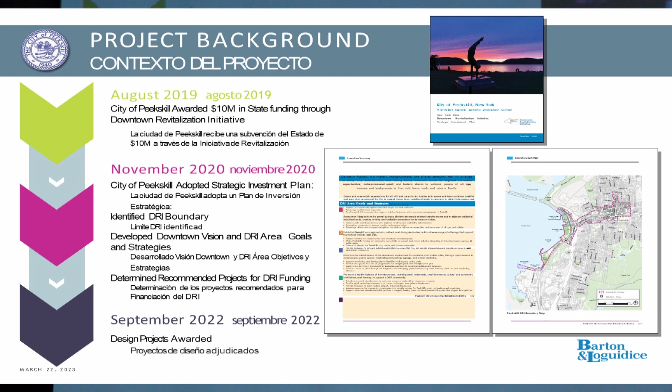In September, these 2 projects were awarded to B&L, Barton and Loguidice, and we've been working closely with the city ever since. We started with a site walkthrough with the city back in September of 2022, and we've also had a surveyor come survey key areas along our project corridor, allowing us to bring the conceptual design we're looking at today.

During this time, we've also met with our Project Advisory Committee twice and presented this to the City Common Council. The drawings you'll see tonight were shown at the PAC's second meeting at the end of February and to the Common Council earlier this month. Now we're meeting with you, and we'll take all your comments to further these drawings into the final 95% design plans.

We're meeting with Peter and the city weekly, so all of these conversations and designs are still a work in progress, looking through all the different opportunities and constraints throughout this corridor.

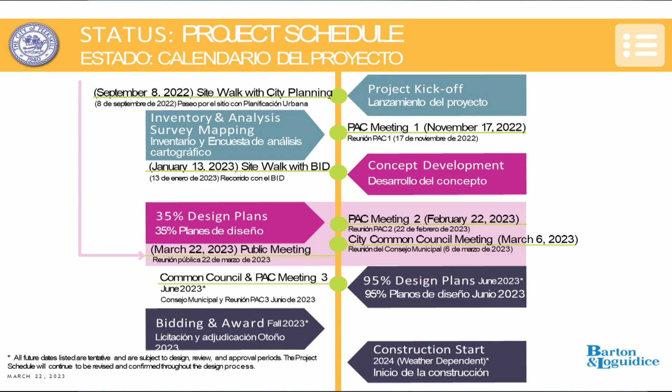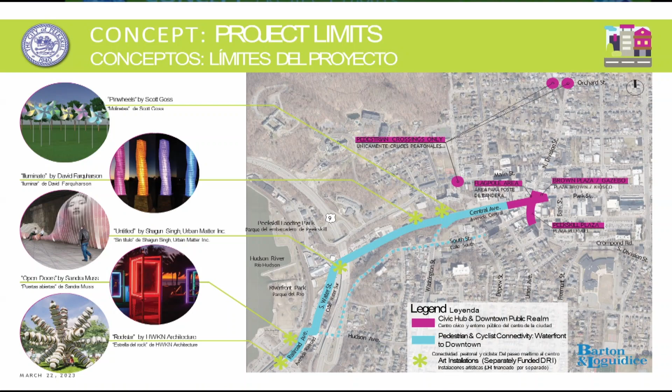Throughout tonight, we'll be using terms for active transportation and multimodal transportation, so to get us on the same page: a cycle track is a 2-way bike lane. Bike lanes you might be familiar with travel in the same direction as cars, with another lane in the opposite direction. A cycle track instead has 2-way bike traffic on one side of the street, separated from vehicular traffic by a buffer.

A shared use path is where bicyclists and people walking share the pathway. These are used in situations where there's not enough room on the roadway for bike lanes or a cycle track, but there is enough space on the sidewalk area to allow bicyclists and pedestrians to share the space.

A sharrow is a marking on the pavement, which is another case where there's not enough space to have a designated bike lane or a cycle track, but it allows vehicles traveling in the space to understand that bikes are sharing the roadway with them.

Bollards are vertical separation pieces that can be used. They're at the end of North Division for when they close it off for Restaurant Row. The bollards are on either side to prevent vehicular traffic from entering that space.

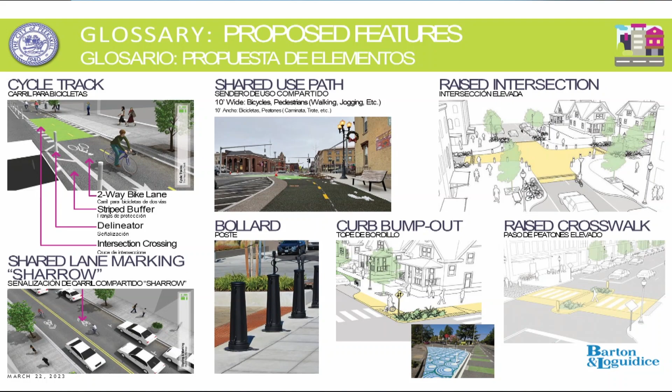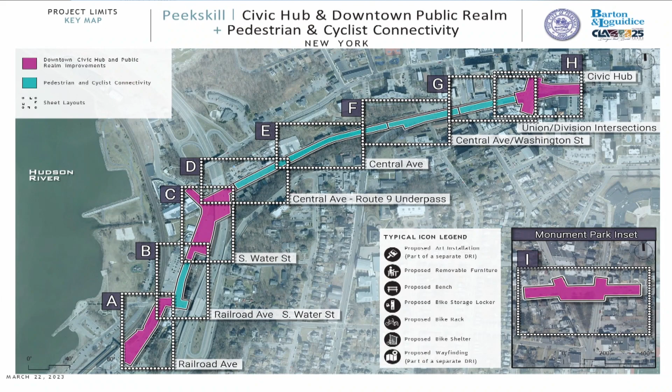This is an overall map of our project area, and our presentation tonight is going to walk you from the train station down at the A rectangle up to the intersection of Central Ave and Division at the H area. I'm going to hand it over to Dan now to start taking us up the corridor.

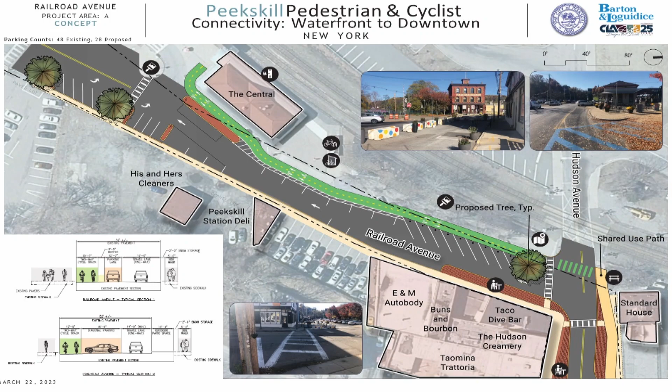As we wrap around the corner, from Hudson over to South Water Street, we pick up the cycle track again in front of the parking lot. In order to make this cycle track, we're showing rearranging how the parking lot currently exists.

Currently, it's like two parking lots, so we're consolidating it into one parking lot, and then reimagining that space with a new curb layout, new driveway entrances, and room for a planter strip for trees and the cycle track on the west side of the road.

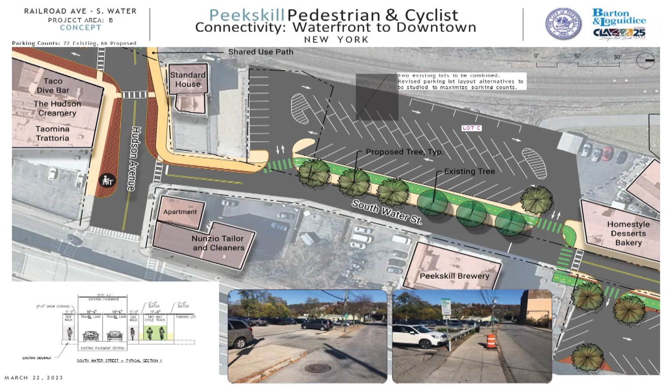And then as you approach the brewery here, another cyclist and pedestrian crossing of Hudson, or of Water Street.

So after we make that crossing, continue down Water Street as we approach Central Ave. Same idea here as on the previous slide, kind of fixing the curb line. Right now these spaces are right up on the road and people are just pulling out onto the road. There's no real parking bumpers or curb or anything, it's not ideal to have pedestrians there or cyclists. So formalizing that parking a little bit better and creating that barrier with curb, the cycle track area, forcing people to actually back out of the space and use the driveway entrances as everyone really expects a car to do. And also that provides us that space so we can get that dedicated bicycle facility here.

I'd also like to point out this intersection of South Water Street. Right now that pavement is so wide, and that angle here, it's just an opportunity for people to speed through there. It's just a very wide open space. And once you're here and you're looking that way, you can see from one end to the other. It's just very inviting for someone to speed. So we're trying to tighten this up, create this curb bump out here, forcing drivers to pull up and kind of make a right angle, force them to stop, and then you have to actually take a 90-degree turn. And same with over here, we're bumping out this area so people can't have that straight shot. You have to kind of snake around. It's just subtle ways to force people to slow down and make sure your eyes are paying attention to what's happening around you.

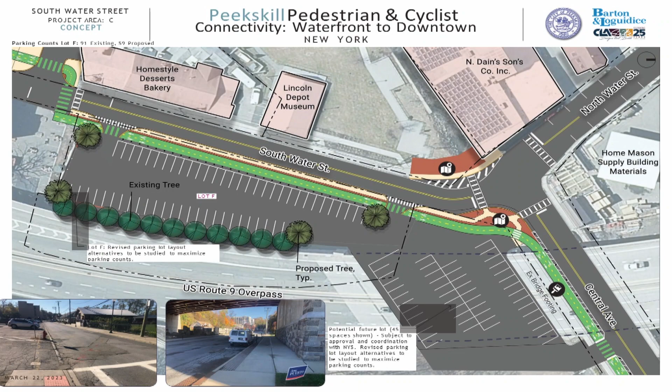And we will move over to Central Avenue. So at Central Avenue, we have the cycle track on the south side of the road. And in order to do this, we're staying within the existing pavement limits, so no actual road work here. It's just reallocating the space that's available, shifting the travel lanes over, kind of defining them with the yellow center line, so fit the cars where they need to be. On-street parking would be available down at the bottom of the hill here. And the south side was chosen because there's less conflict points, less driveway crossings than the north side.

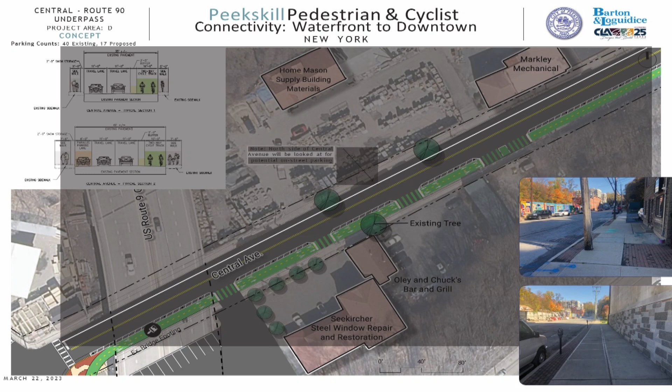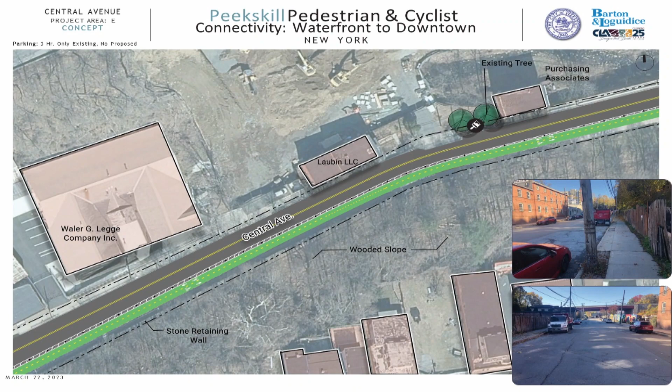Let me see if I can go. Just going up the hill, the same idea, the same theme, just reallocating the space, moving cars to the north, cyclists to the south, and a cross-section view of what that would look like, elevation view if you were standing on the road. So this is what we have now, kind of wider travel lanes, parallel parking, and once you get up the hill, as you start to make that turn, the road narrows, so there would be 2 travel lanes here, no parking lane, and the cycle track. So this is ultimately what it would look like when the project is complete.

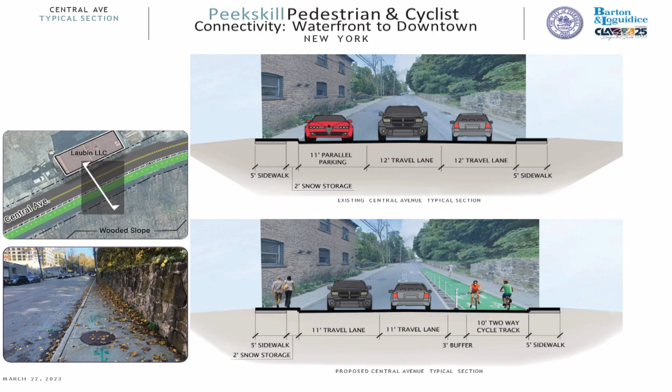And again, going up, here's Washington Street intersection, which is kind of an interesting intersection in itself. So we've tried to clean it up as best we can as far as the project objective for here goes. And making it very apparent with this green dash striping that there's other people using this space rather than just cars. So we have Sharrows on Washington Street. We're shortening up this crossing, getting rid of that little triangle island that's in there, extending the curb out, and formalizing these crosswalks for pedestrians just to try and help make everyone pay attention when you're driving that there's other things happening here and we have other facilities for other users now.

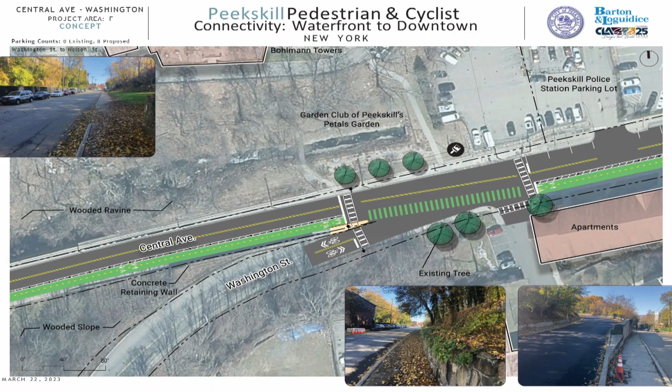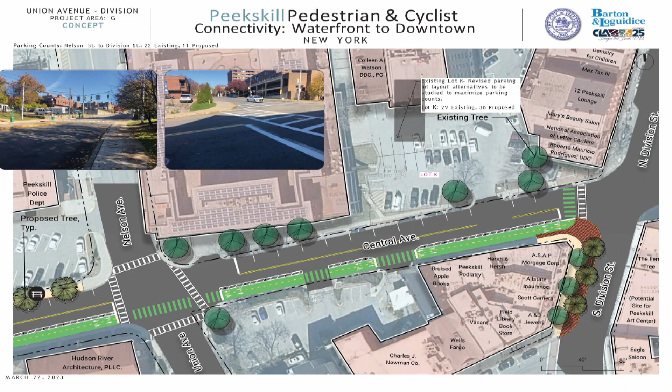And as we approach the end of this project corridor, where Central Ave meets North Division, South Division Street, so we cross Union Ave here. So we're fixing up the crosswalks again for pedestrians and the cyclist crossing here. Couple driveway crossings as we approach the end. And again, we're changing how the space looks now, allowing parking on the north side, using the south side for the cycle track. And ultimately, as we get up to the intersection, we're crossing, and this is kind of the termination point for the connectivity project, which is where the Civic Hub project picks up next.

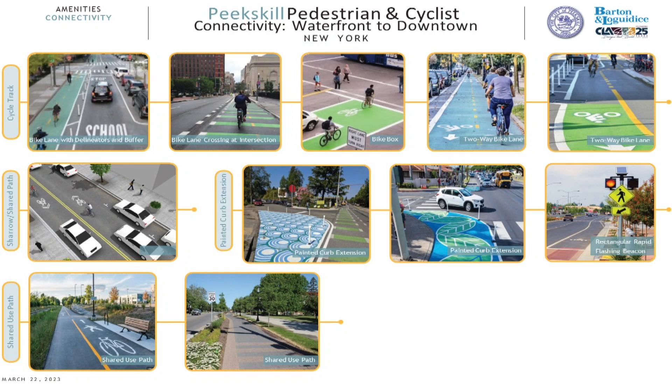On the previous slide, we do have state grant funding to improve the crosswalk. So at Union and Central, on the image shown, we hope to make it a high visibility stamped concrete red crosswalk like others downtown, and that's something we can continue to build out.

And then the most important thing is budget. We have a limited budget, and I will work hard to get more money, but at the end of the day, we won't necessarily have enough grant funding to do everything that you will see tonight. So part of the reason you're here, and we're hopeful for your feedback, is to understand what the priorities are from the community so we can make some difficult decisions.

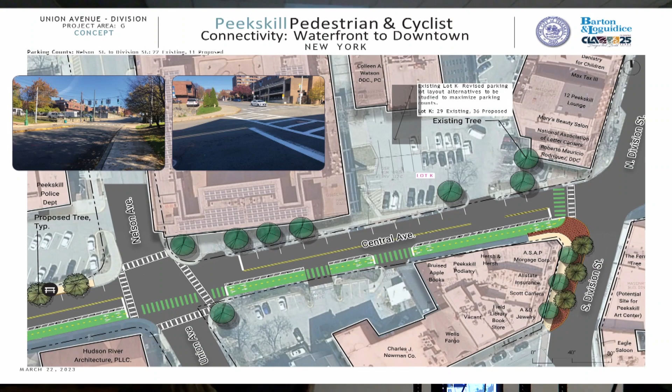Okay, thanks. Thank you, Corey. Okay, quick question. No, I love this project.

I'm really looking forward to full bike lanes. The question is about one of Peter's last comments, that there's not enough money basically. What are your proposed cuts or ways of minimizing things to make it fit the budget? So the question was, what are we thinking of for proposed cuts to reduce the budget to fit what the project funding has available?

Okay. So do you want me to get that? Or, there you go. No, I was repeating it for the interpreters. Sorry. Yeah.

So we're here to get feedback on what everybody in the community likes. There's no preconceived notion that we're going to get rid of this object or this scenario here. We want to take the feedback today and work with the city on what's feasible for them to maintain and keep going in the future. But there's nothing planned at the moment.

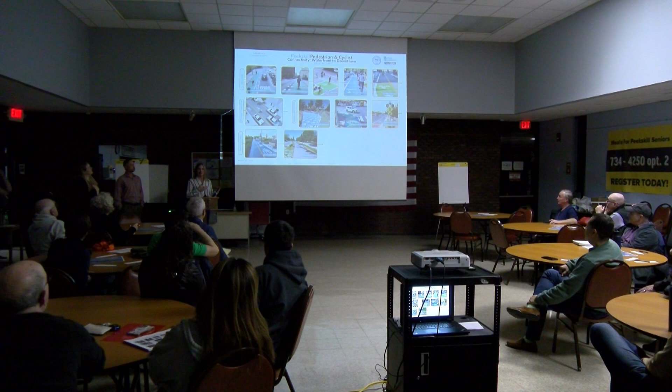One thing I wanted to point out on this slide, we talked about curb bump outs, and at the intersection of South Water and Central, on one side we showed a curb bump out. Am I losing the battery? A curb bump out here, but on the other side, we're not adjusting the curb line, but pinching the vehicular area with a painted no driving area.

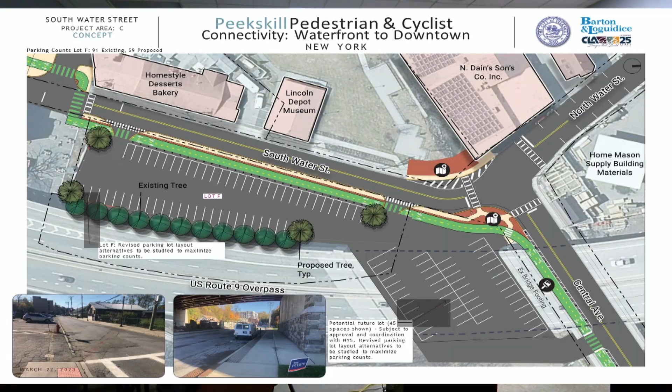So that's one of the ways we can do it if new curbs in areas aren't possible, or there are options to just do painted areas or things like that. Even with that, it doesn't mean we're going to be able to handle everything, and I think phasing will be very key. To Dan's point, listening to you about your priorities will help us understand and work out that phasing with the city.

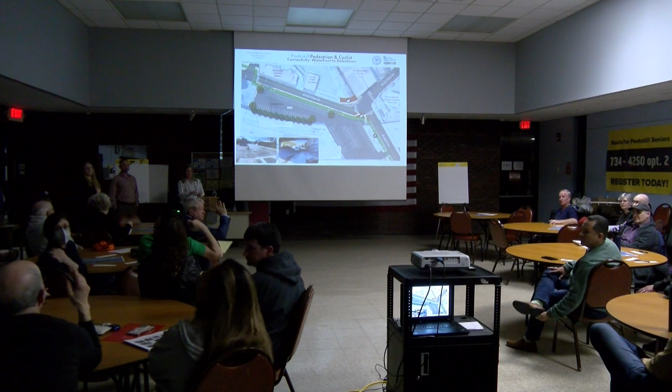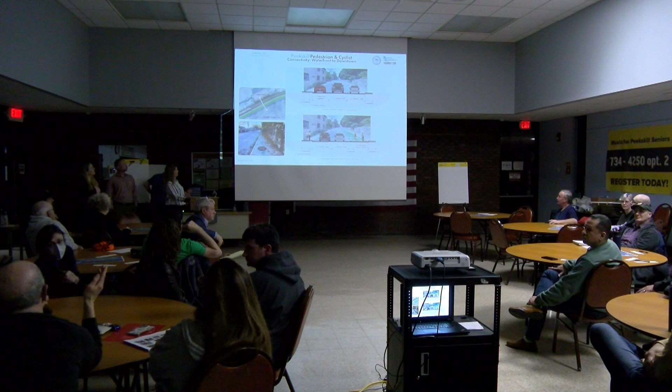I'm curious, going up Central Avenue, you show the lane on the south side of the street. Do you know approximately how many parking spaces are being lost? There are a couple of development sites on that side of the street, so I'm curious what happens if those sites eventually get developed and you have the bike path running there. I happen to be on the planning board, so that's why I'm thinking that. So I was curious if you counted how many spaces we might be losing, or gaining.

On-street parking for Central currently has 40 spaces, and with these proposed changes, there would be 17 remaining, so 23 lost.

We got Tim next, maybe? Yeah, I'm sorry. Thank you, this is very exciting. Thank you so much, I think this is going to make the city greater.

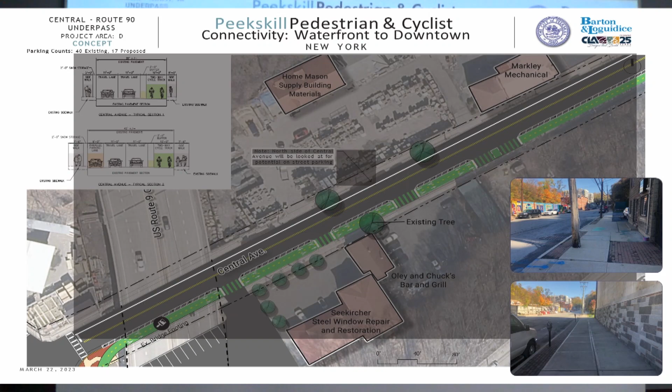I just had a question about the area closer to the train station. It seems like you're putting the bike lane right on top of the sidewalk, and I want to make sure the sidewalk remains and is prioritized. Maybe on that street, which is less busy and only for drop-off and pickup of trains, the bike lane could actually be incorporated into the street rather than the sidewalk. There are a lot of pedestrians there, so I don't want to take away space from them.

Yeah, we're not intending to take pedestrian space away. The cycle track is on the roadway piece here. So it's just a...

So I think you're just seeing the trees over the sidewalk, but the sidewalk is actually back behind it. It's just a tricky image beneath the rendering. Okay, so the only moment of combination is in front of the Standard House. Yes, okay.

I think let's get a couple more and then keep them moving.

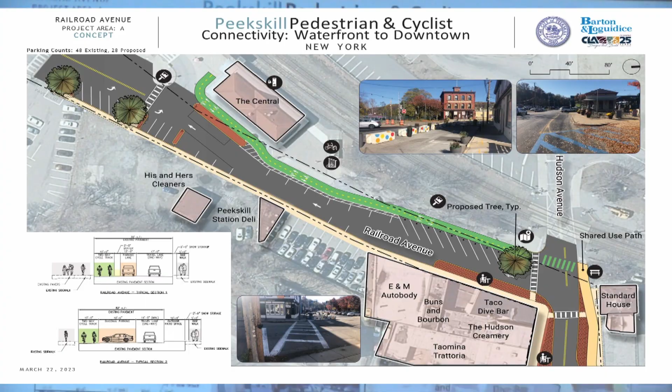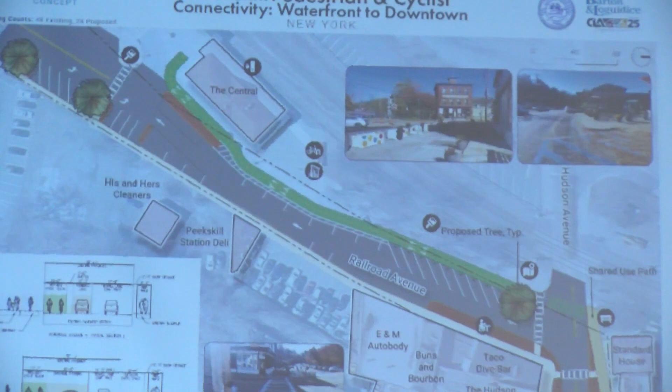Just looking at this picture, I have a safety concern with this intersection. As people walk at the river, if the train signal is down, people will stop, but they will cut around, crossing the double yellow to make that left towards the train station. You mentioned MTA is looking to do something. Is there anything that's going to prevent that? Because I'm just waiting for an accident to happen as cars are stopped to go onto the Riverfront Green. Cars trying to get to the train station are going to cross the double yellow there and hook that left.

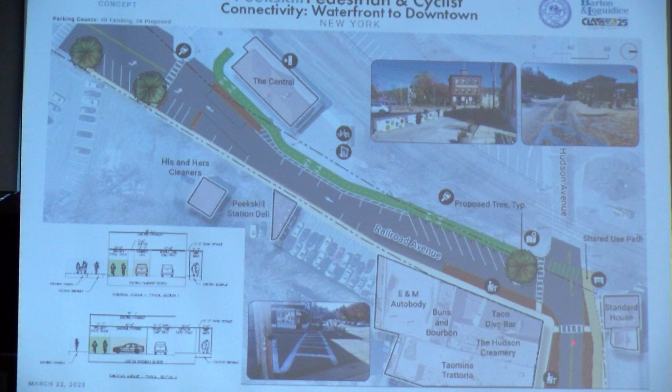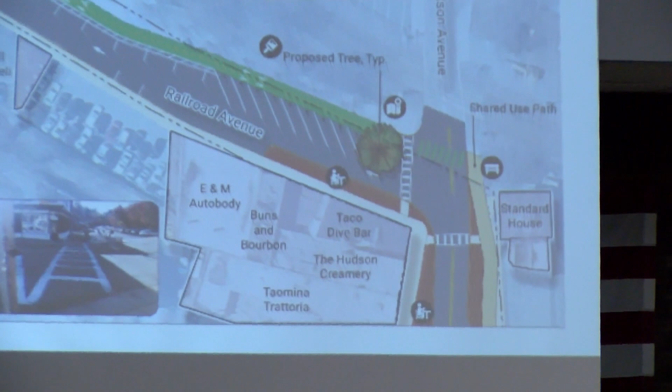The Metro North Railroad got a $2.5 million grant to make safety improvements there, so we're sure that we're going to do something that mitigates that problem. It's not shown on this slide. They've presented to the council and got some feedback. I'm trying to channel that feedback and make sure it works with this project. By the next time we present to the council, we'll show that, and it'll be a lot better.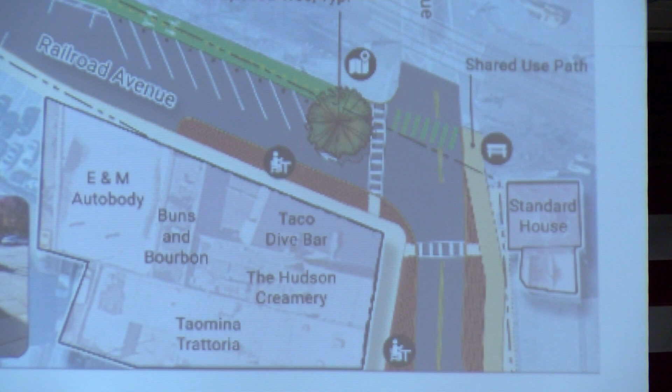Okay, one other question with the loss of the parking spots - how much annual revenue will the city lose from those spots no longer being metered?

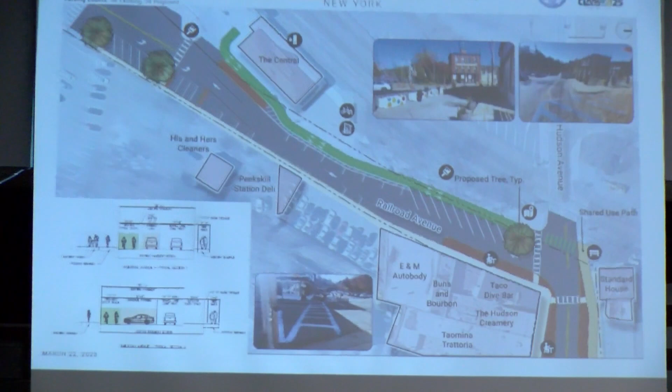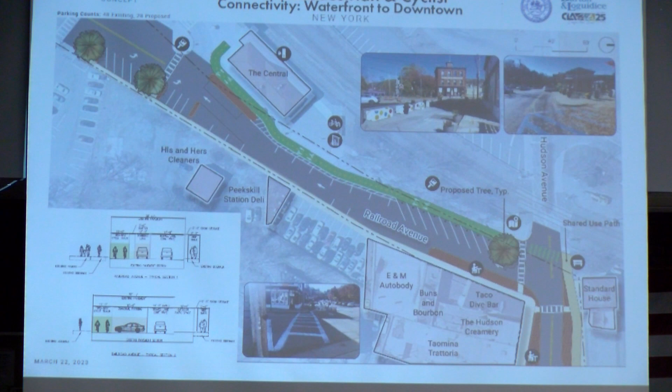Well, that's a good question, and we can model that. We know the current demand is pretty low, especially along Central Avenue. Central Avenue does have metered spaces at the bottom of the hill. It's very small print, but I'll make this presentation available. Every slide has parking counts in the current and as-built scenarios, so we can use that information tomorrow. That's a good question, thanks.

Okay, just one last one since I have the mic - one more. For the bike lanes, does DPW have the ability to plow those bike lanes? Do they have the equipment to do it?

It'll have to be maintained, yes. I don't know what the current equipment situation is, but they have the equipment to plow. It is extra work, so we have to get that feedback from DPW. I'm done, Peter, thank you.

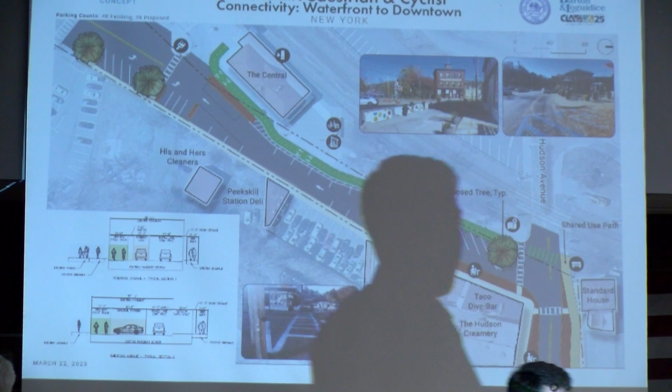I think we'll make this the last question just so we can make sure to get through the whole presentation. We got tons more at the end.

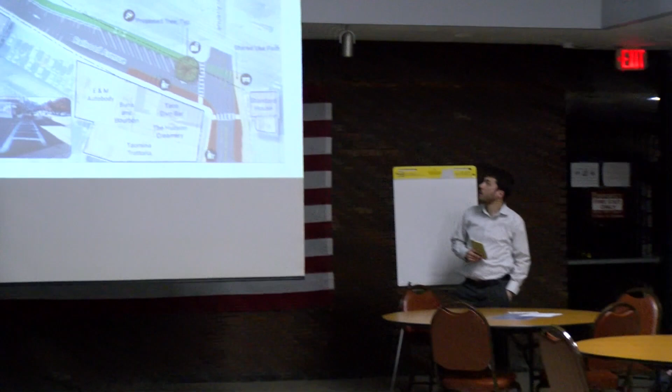Well, I was going to pass the mic here - was that someone else? So this one's related to the last two questions. For anyone who drives to the train station during rush hour, these days it's very congested when the train arrives. So I'm curious if any impact studies have been done on the narrowing. I see Railroad Avenue is still one way. At some point in time it was a two-way, so you could exit up Central - that's not the case anymore. And then I'm also concerned on Central - you've got Dain's, you've got the masonry business. I routinely see very large trucks there dropping off and picking up. They have to take these wide turns in and out of the businesses. So again, the narrowing of the road, if there is narrowing, have any impact assessments been done on the flow of traffic, the safety concerns when these large vehicles are trying to get in and out of these businesses?

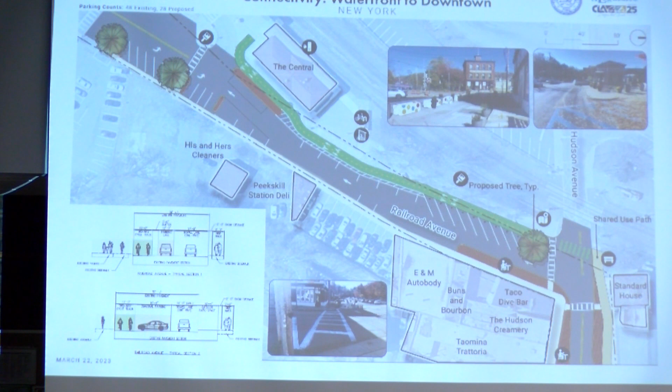Yes, we looked at the width of the road. There's standard widths for each type of roadway, so Central Ave is classified as a certain type of road. The travel lanes are accommodating all the traffic that's on that road. Yes, there's some larger vehicles that use the road that have to go to those commercial businesses, and they will still be able to access each driveway as they do now. They just will have to work their turns a little bit differently - instead of swinging out wide, they'll have to make some longer turns in.

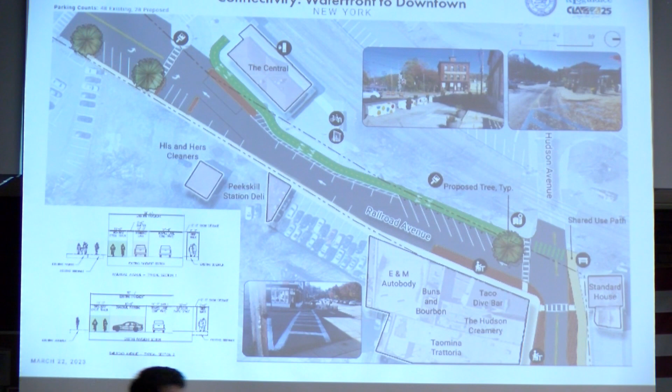So we'll take more questions at the end, but I want to make sure we get through the rest of the presentation. I think Nicole will take from here.

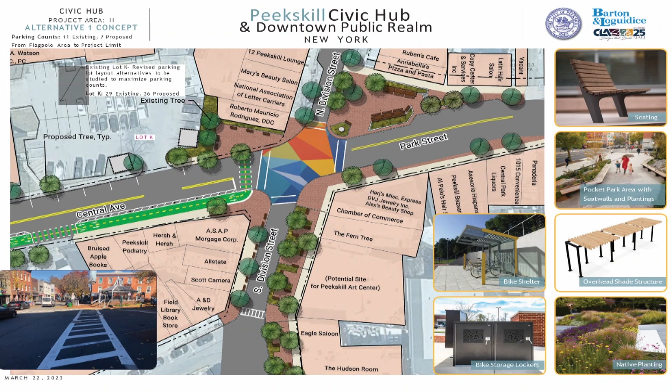Also with this concept on South Division Street, we did a traffic study, and it showed that the two northbound and southbound turning lanes were not fully necessary through here. So what we did for these concepts is show just a two-way traffic flow. This east side is expanded to really be this new pedestrian plaza through here, and the curb line on the west side would stay the same.

All right, here's a cross section of South Division Street for this first alternative. Up top you can see the existing sidewalk, turn lanes, travel lanes, turn lane, and then sidewalk. Below, the sidewalk is still in the same space on the west side, with 1 travel lane in both directions. Then the pedestrian plaza space really expands for the businesses along this side to embrace this outdoor public realm, followed by another sidewalk wide enough for two-way traffic. You can see some images of what that could look like in this space.

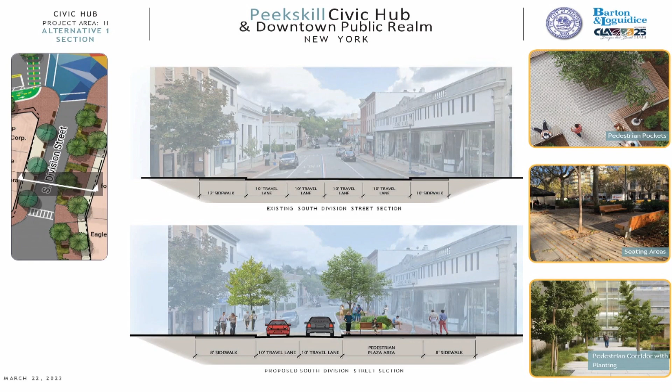For alternative 2, same thing, starting at the top left here, lot K. We looked at the same pieces for maximizing those existing parking lots from the city, some bike storage facilities, and you'll see these more organic curvilinear shapes for this alternative, shown in these photos on the right, for a different feel with this concept.

These crosswalks at the intersections are raised, so the intersection itself is still at road or vehicle level, but the crosswalks are now up 6 inches. It's almost like a speed hump, but just for the crosswalks.

If you come over here to this plaza, it's broken up a little differently. This level here would be up above the street 6 inches with the curb height. Then you have the step system, shown in this image, which acts as steps to walk up and down and is also wide enough to sit on. So if this was a lower event space, this would act as a seating option. This is up at the same level as that ramp along the buildings, so there are 2 or 3 different tiers through there.

Coming down on South Division Street, in this example we are taking a little bit from both sides, the east and west, for the pedestrian plaza space. So you're getting that pedestrian plaza on the east side and on the west side, and you're still removing those 2 travel lanes.

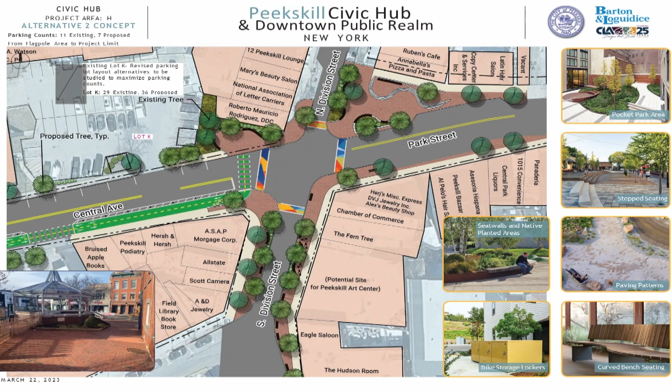These are just some images you can see on the wall as well, showing options for what the space could feel like, with precedent examples of all the different furnishings. This is another version.

The final area included within this project's limits is the intersection at Orchard Street near Monument Park. There are some concepts for improved crosswalks up here. We showed a couple of options: a white ladder painted crosswalk, the city standard concrete stamped option, and also the possibility for a more artistic crosswalk, along with some pedestrian signal improvements for those two intersections.

That takes us to the end of going through the concepts. We can open it up for questions on the Civic Hub, and then have some general discussion after that.

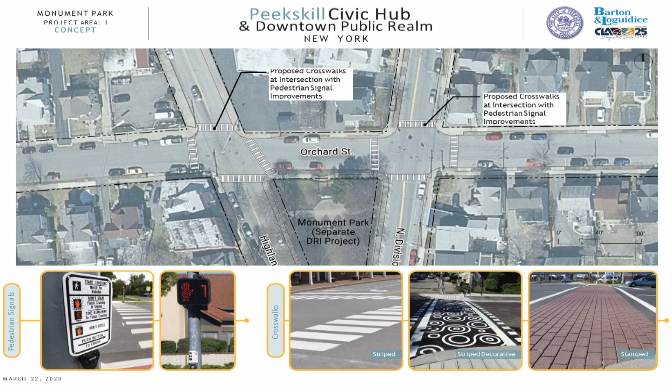For Lot K, is there any plan to close access from the parking lot just to the north of it to prevent through traffic?

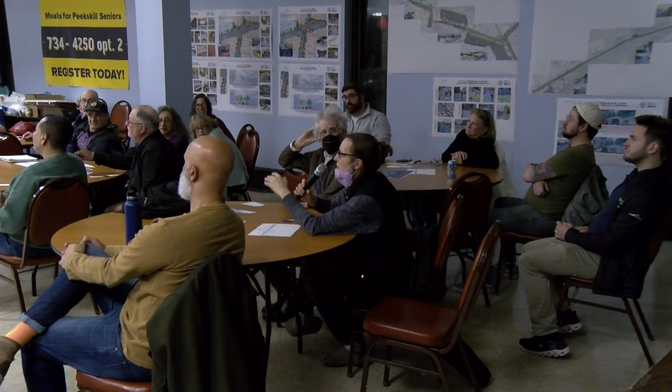I think I might have... sorry, I'm not getting the order quite right, but I got one over here.

I was wondering about the trees, because so often trees die so quickly in urban settings, and we've lost so many trees in this town. It looks like you have some interesting tree protocols around planting and protecting, which is wonderful. The DEC is having a meeting on the upcoming round of street tree grants for urban areas, and our community would qualify. I know it's great to group trees in islands, since that gives them more room. I don't know if there's a plan I can look at to learn more, but I would love to see the trees last more than 5 years, even if there have to be fewer of them, if we can plan for a few that will make it, because it'll make all the difference.

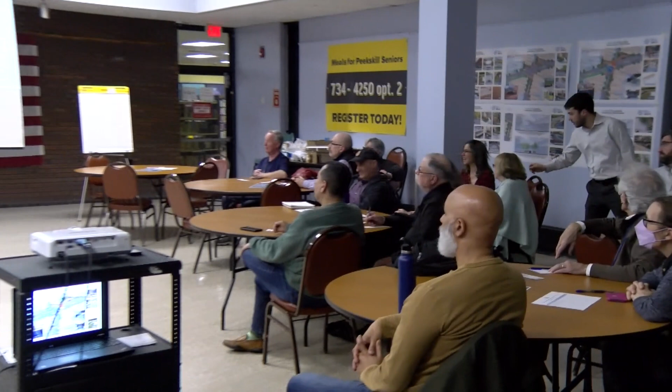Trees in the urban condition are obviously very hard to get to grow. In our experience, we've used different soil media, giving them enough soil underground to help them grow. One thing we use in urban conditions is structural soil, a gravel and soil combination that helps with drainage. It lets the roots grow where they need to go and helps keep roots down so you don't get heaving on the surface, which can happen with asphalt or when tree areas are too small. So yes, we do have some ideas and solutions that have worked in other urban areas.

Hi, first of all, thank you for your presentation. I can see this has been a tremendous amount of work, and I'm interested in how it's developed over time, having been involved the whole time. My question is about it expanding in front of the old Ford Piano building up the street. What happens as you get in front of Rocco's? I know there's some infrastructure there, a big light pole, some other stuff, and it gets very narrow. Where does it end? Does it go all the way to the corner?

The expansion goes past the Hudson Room, just to the intersection, so it's between the two intersections.

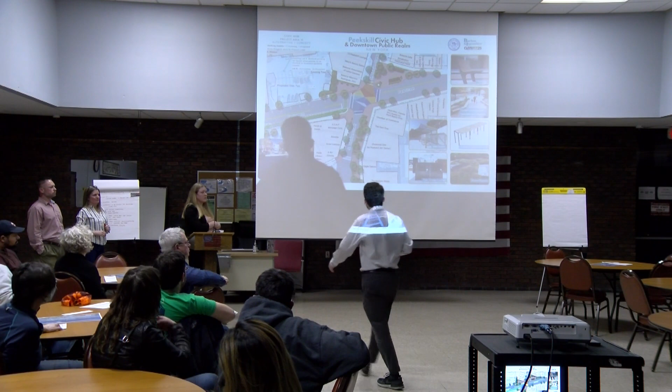Are we down further, or are we off the page? I'm sorry, I don't know the exact light fixture, but we'll have to look at all the existing infrastructure. There's one storm drain on the north side of that block that we're aware of. The big thing for us is making sure to work with DPW, the police, and the fire chief so emergency vehicles can navigate these curb lines, and they've been really supportive and helpful so far, so we're optimistic about that.

Let's walk and take a look. Yeah.

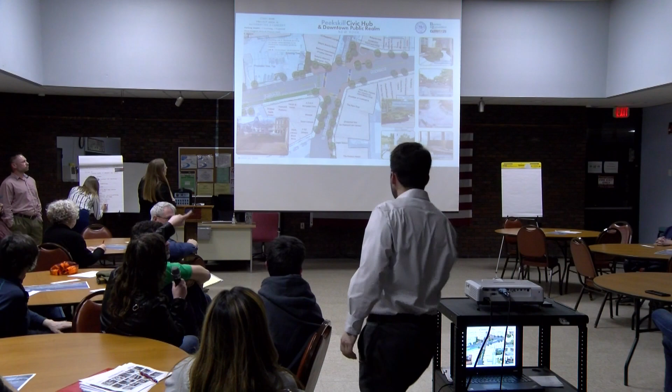Thank you. I love this first gazebo design, but I have a question about the second version. Up where the gazebo used to be, is there no shade in that one? I'm just wondering if there are shade structures up in the gazebo there, because I don't think I see them.

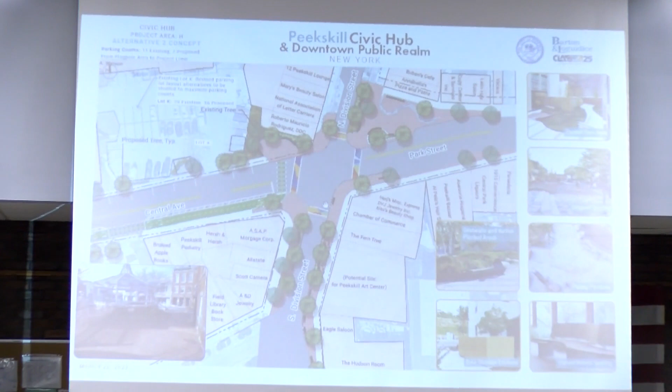Yes, there should be shade structures. I think they're just not showing up on this rendering with the lighting and everything, but the thought would be to include some smaller shade structures in both alternatives, just to make it a more pedestrian environment.

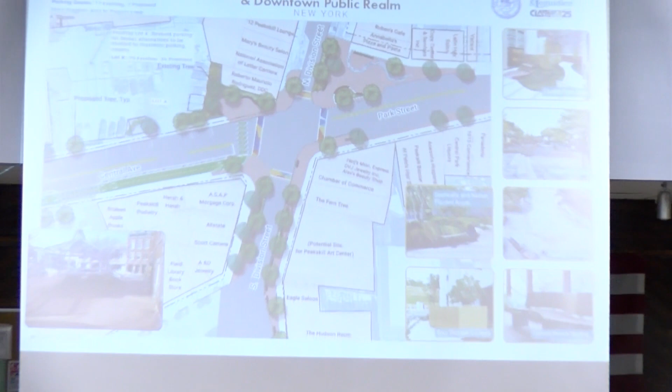I see a lot of hands. I'm just going to try to get people that haven't had a chance yet. Some of the hand raisers, some people know how to get a hold of me anyway, so.

Hello, I'm just wondering if either of these schemes would accommodate further expansion of the bike lane in some potential future project, because it looks like it just kind of ends there. Obviously the idea with bike lanes is to keep adding to them.

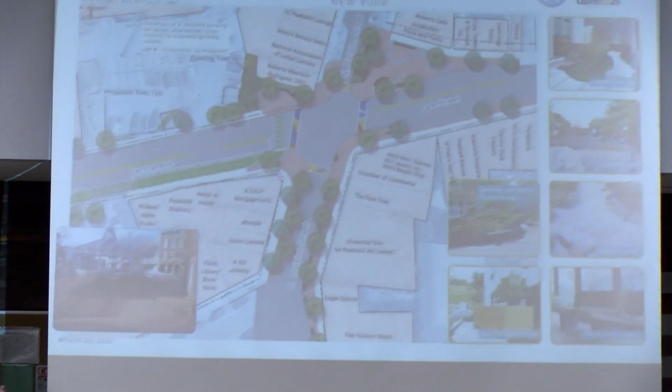This project, as currently funded, would end here. However, the city is looking at future grants or projects that could keep those moving. Okay, thank you.

Oh, I got one in there. Everybody's getting their first shot first.

But she has asked a question tonight. I'm aware of that, yeah.

So I heard it mentioned earlier about phasing. I would imagine in each of the individual corridors, without all of the aspects, it's probably more unsafe than it currently is. So when you say phasing, does that mean the small sections that you went over in the presentation at a time, and sort of have this project grow over time?

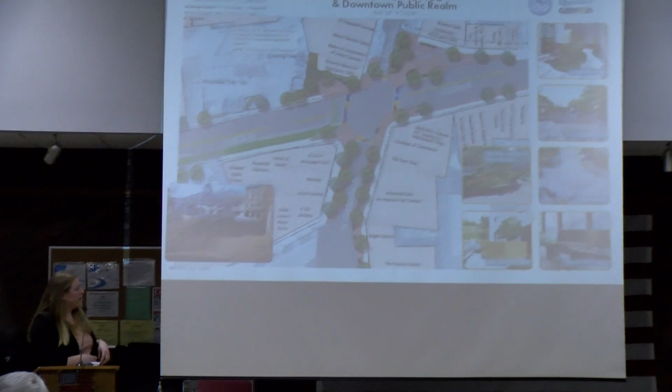I believe the goal would be to implement most of this. It may just be different types of implementation. So like Lee was showing, some of these bump outs might be painted on the pavement for the first year or so, until additional funding might be able to be raised, or the city sees how those spaces change. And if they're really successful, they might pursue additional funding if that's not able to be done as part of this. But I do think these spaces are meant to all be improved.

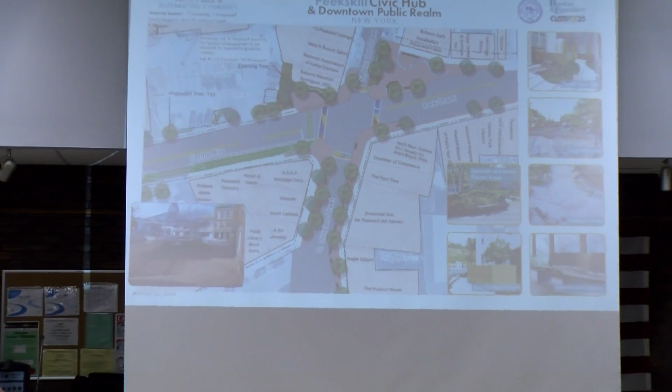Right. I mean, as rollouts go, I think it would be really great if one area could sort of receive the full fanfare, which could really show the potential for possibly expanding in the future or adding more of these features in the future.

And then the other question is, my view, and I try to spend as much time as possible in all of these downtown areas, my view is that the illegal parking and the double parking and the triple parking is what causes the cars to navigate in unfriendly manners, which is what causes most of the unsafe conditions.

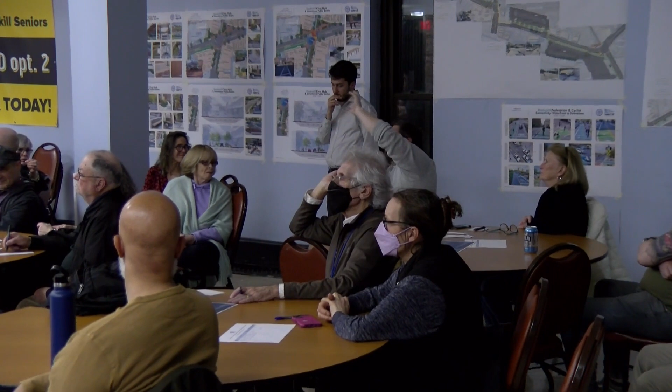How do we prevent all of this from becoming 15-minute parking?

Yeah, that'll just be an enforcement issue that has to be upheld once this project is implemented. There will be, so on Central, I guess I did not go into detail of this, but to separate the cycle track from the vehicle travel lanes, there will be vertical bollards, or posts. So you're not going to be able to just drive over there and park when you want to, but it will be an enforcement issue too.

Okay, I love the Central Plaza. I just want to talk about the plaza area. I think the raised plaza, and I know that this is budget limiting, but the full raised plaza actually really makes it a space and a place.

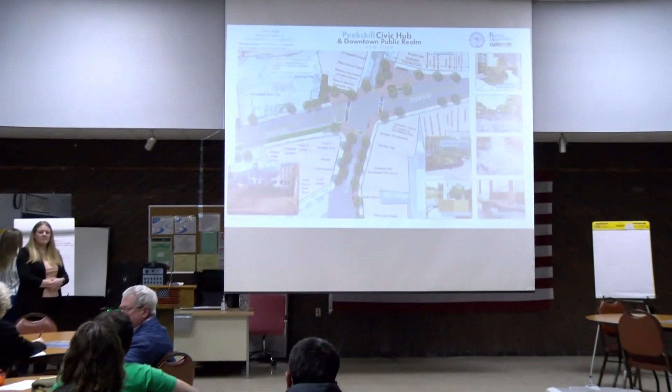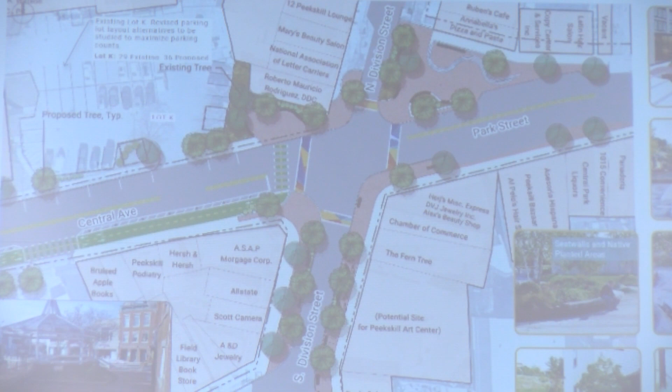And also because that's where the central, where I'll call it the bandstand, I don't remember what it's called, when there are events down there, I think the raised walks - well, I love them because I want them everywhere - but they may actually be a little bit of, I'm not going to say a tripping hazard because you do go up and over, but when there's a big event like that happening there, that's... I mean, it should work.

But the other part is I much prefer the part of South Division that's in front of what is going to be the new Arts Center, which is now Ford Piano, because that actually creates another space, another place, rather than just a wide sidewalk, two wide sidewalks. The idea of what's wonderful about having places in the city - if you think of the city as a house, the house has, where do you spend your time?

You spend it in the living room or the rooms of the house, not the hallways. The hallways are not so important. And if we, I think, by just making wide sidewalks and not making it a place, then you're actually just making it another hallway. And we have plenty of hallways here in Peekskill.

We need the spaces because it also then becomes - we need the rooms, we need the places to be. Because what this does is also then you get a whole series, the whole downtown becomes a series of places, from Esther Place now to the one in front of what's now Ford Piano, to where the old gazebo was, that central point. You move over towards the renovation that's going to be at Pugsley Park. It just really strings the whole center of the city together.

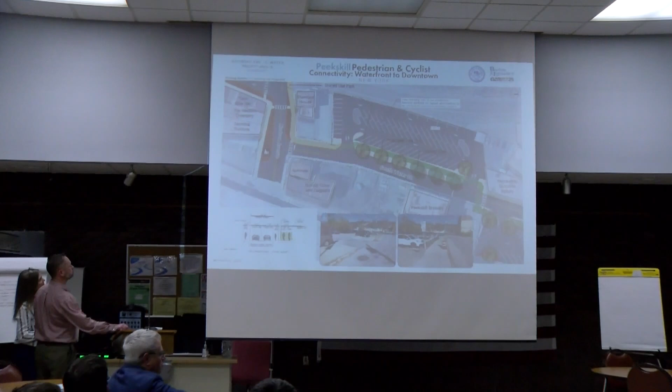While you have this up, does the reconfigured parking lot behind the Standard House close the second access point at the Yellow Brick Road? My office is above there, and I know that Stephen, for the wine cellar, has trucks that come in and back in there. It looks like that parking lot takes away the ability to drive through the Yellow Brick Road in and out again. Right at the top of the Yellow Brick Road behind the Standard House, there's an exit point that lets you go back into that parking lot, but there's no spaces in that corner. If you close that off, you effectively cut off his parking behind the building and his ability to receive deliveries, plus the tenants using the spaces currently on the Yellow Brick Road would have their parking cut in half because we can't turn around.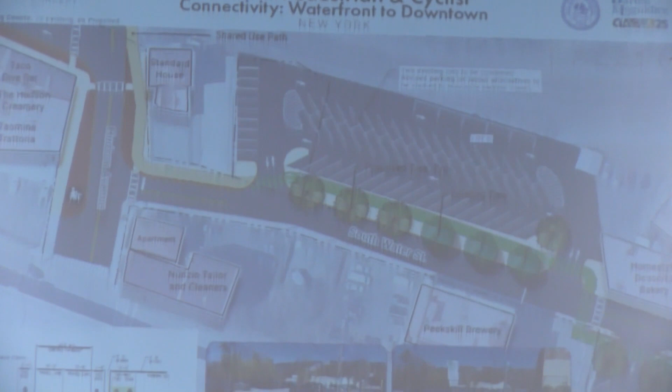Okay, yep, we'll look into that one. That's for sure. Yeah, you got that right.

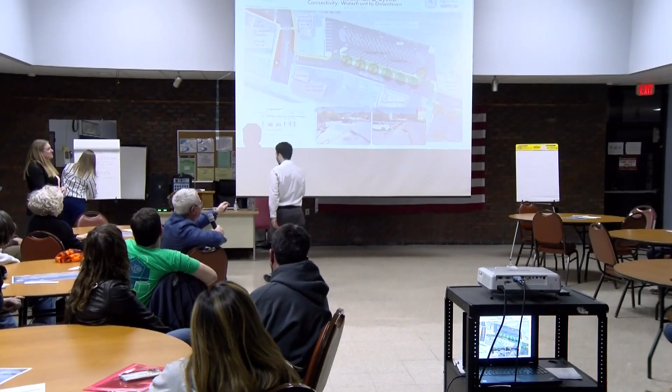For the businesses on the left and right of the hub, if you expand it out, are those businesses now responsible for snow removal up to the street?

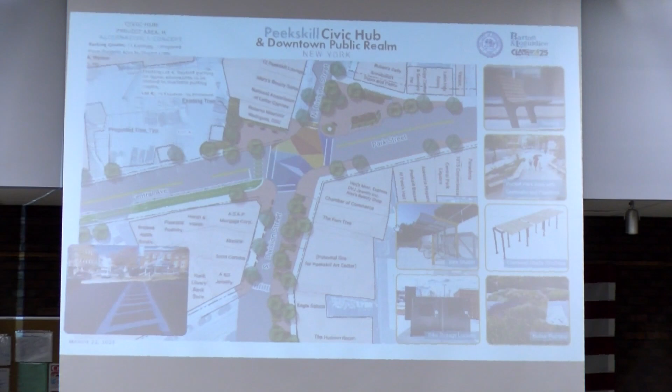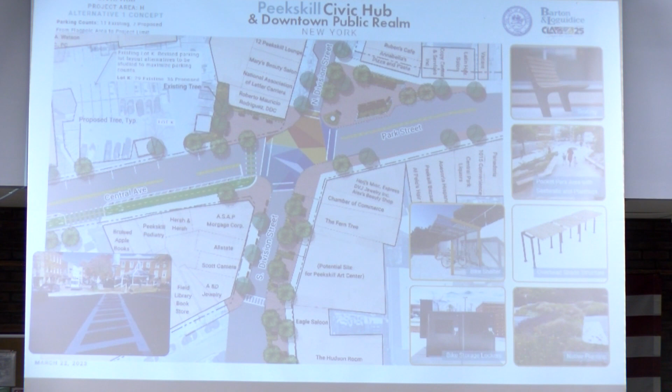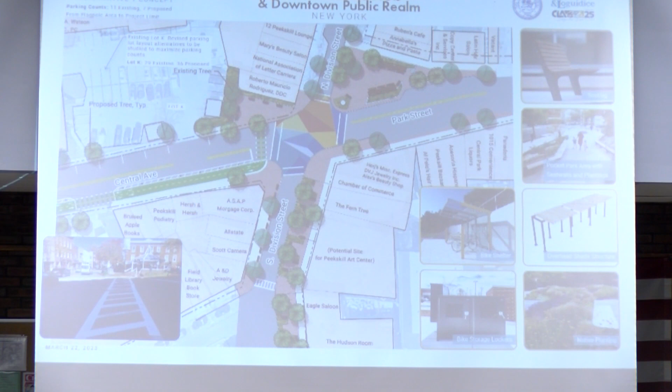I think that's a fair question. Part of this process is making sure we're working with all the business owners that front on our project area, including the Gateway Chamber, the Standard House, and all the businesses on Central. We're going to have to come to the table and find a compromise. I don't personally know all the regulations about street cleaning, so I'll have to look into that. Then the other concern, and I like the idea of having additional spaces, but when you have a place for people to sit, the reality is litter will increase.

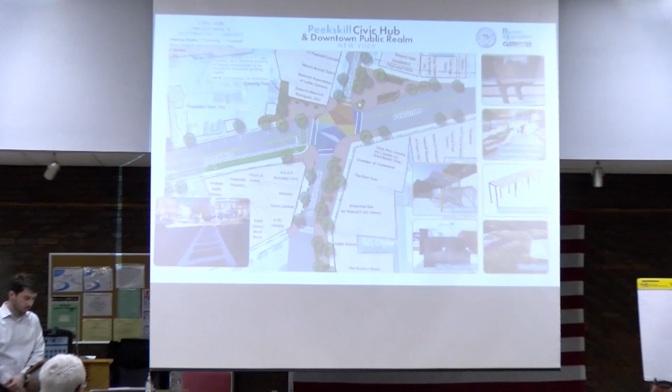So is that the business's responsibility, or is the city going to maintain that? Do you have a recommendation? I think the city should do it.

Then my last question and concern is, if we lose the gazebo, I have a problem with that, because I use that as a point of reference. So when I tell someone where to go, I say go to the gazebo and make a left. I'm going to have to come up with something else.

I think that's what it's like. Go to the gazebo.